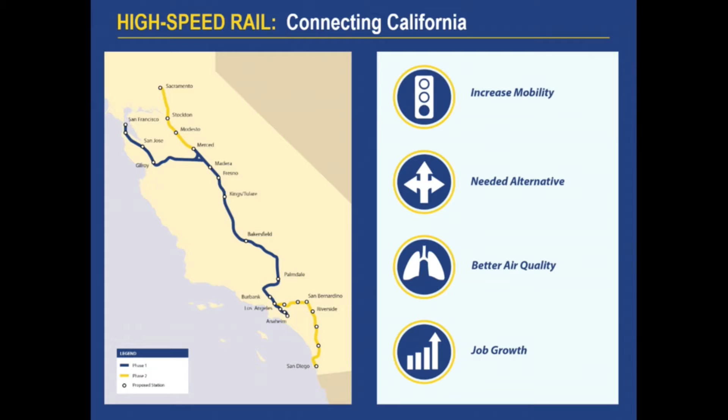It can be quite a challenge to go short distances, and a very big challenge to go longer distances. Just for your frame of reference, if you were to have the high-speed rail operating in the future from Palmdale to Burbank, that trip would take you less than 20 minutes. Today, if you drive, particularly during traffic, that trip takes an hour and a half, possibly even 2 hours. So that's the kind of mobility we're looking at with the high-speed rail service.

We're also looking at the fact that because it's electric, it's not going to be emitting any greenhouse gases into the environment. The state of California has identified climate change as a key issue we want to address through this century. We also want to make sure we are fostering a strong economic climate for the future.

I talked about those connections between the central business districts that will be so critical that this project will bring to the fore. But while this project is being built, there are also a lot of jobs associated with it, and there would be a lot of jobs associated with it when it was operational, because we would need people to take care of the trains, run the trains, and take care of the stations and all the associated equipment with this project.

So those are the reasons why high-speed rail has been selected to complement our existing transportation system. And I think that's key too - this is meant to complement what we have now, not replace anything. Once we start running these trains, they complement our existing trains. We have stations in areas that are easy to get to on other forms of transportation so that you have smooth and easy connections across the state.

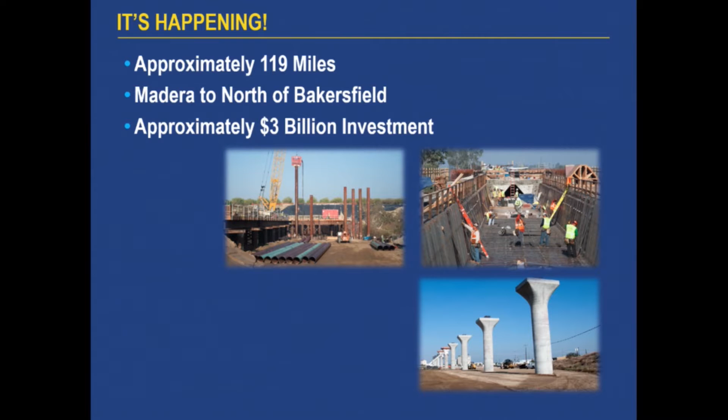You can see on the slide pictures where we started construction, building the bridge structures we need. This is why it's so critical that we do our job down here and define the route we'll build the high-speed rail alignment along, because we're building it right now. We want to do a very good job identifying how we're going to build it down here in Southern California, so that when we get here, we have a whole set of good decisions made and we can continue the construction.

This is the slide that encapsulates what we're doing here from Burbank to Los Angeles. It's a 12-mile section of the high-speed rail project. We're treating it as a separate project for environmental clearance purposes, with a station in the north at Burbank and a station in the south at Los Angeles Union Station.

This marks the transition of the high-speed rail project in Southern California from full-speed high-speed rail coming into the Burbank area, and then from Burbank south to Anaheim, we're entering the existing rail corridor and would be bringing high-speed train service alongside our existing Metrolink, Amtrak, and freight services operating in our existing rail corridors.

When we look at and plan this, there's a lot of coordination we need to do to make this work. We're talking with the other rail providers and we've put forth a series of ideas for this corridor. Number one, we can put additional tracks in a lot of this corridor within the existing right-of-way, then electrify these tracks and run high-speed rail in this corridor.

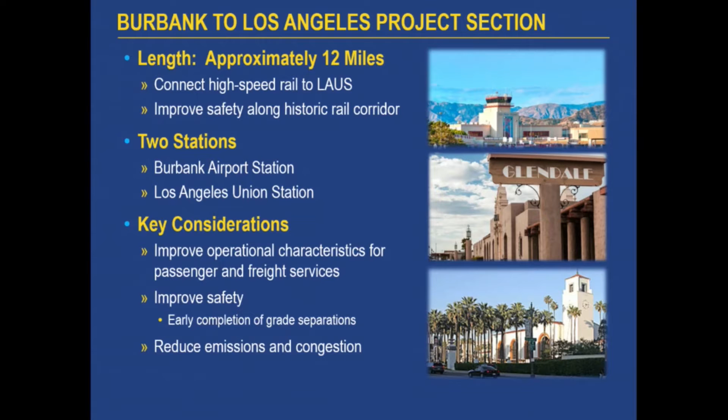While we do that, we can put in the capacity in this corridor to operate high-speed trains as one of the service offerings. There would still be Metrolink service in this corridor, there would still be Amtrak service in this corridor—we'd just get the benefit of all these services in the corridor. That's the general approach we're taking in this corridor south of Burbank.

We need to put stations where we can get the most people riding the train so that we get the most public benefit. Those are the types of things that fall into the project objectives area.

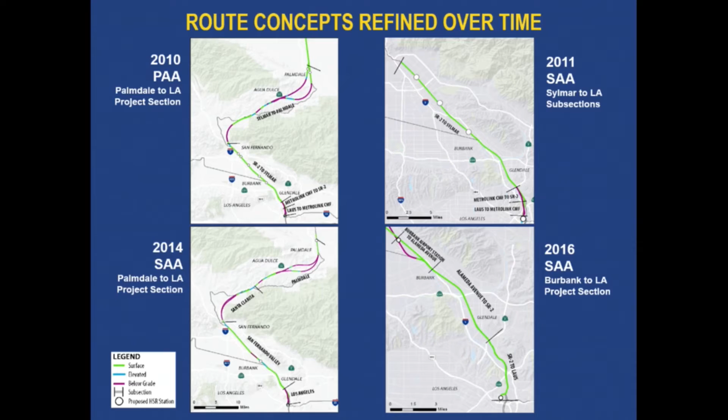With all of the complexities going on in this area, we felt it was very important to study this as a single standalone project so that we could deal with the coordination issues with the LA River, for instance, which is in this area, and with the operation with the other service providers. Over time, we were able to identify this as its own separate environmental document and handle it that way.

It's also very important to note that the decisions in this section do not drive the decisions in the sections to the north or the south. The decisions that are come to for Burbank to Los Angeles, particularly with regards to the station configuration, don't in any way influence what we would ultimately end up selecting for the Palmdale to Burbank project section. So that's something very important to note here as well.

Here at a high level is a summary of the principles we're employing as we look at these urban corridor running projects. You can see up there at the north, there is a purple section that is on a curve, and there is a green straight section.

We have been looking at two potential locations for our platforms for our train to stop in the vicinity of the Burbank Airport. One of those locations basically brings that stop very close to where the airport is proposing to relocate their terminal. We've been looking at this for a couple of years, and they needed to go through the election process to have that terminal replacement project approved.

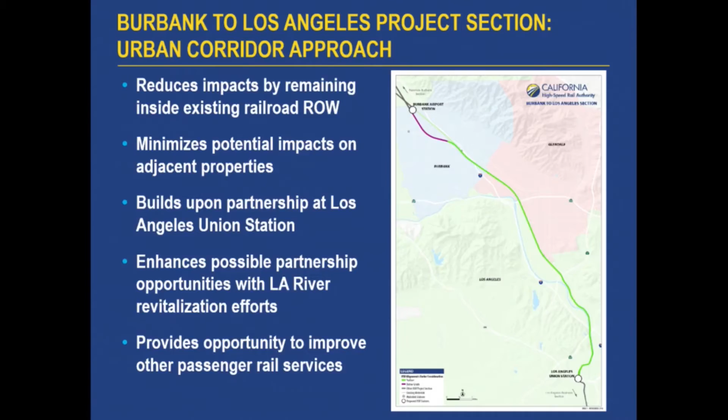So again, we just want to stress that this is a mixed use corridor. There would be multiple services operating in this corridor. It is owned by LA Metro right now, and it hosts the Metrolink, Amtrak, and freight service. It would continue to do that in the future. We would weave in high-speed rail service into that mix and increase the capacity there for more train service.

And with that, I'll bring up Melissa to talk a little bit more specifically about some of those features of sealing the corridor and creating this high mobility urban corridor concept.

Good evening. So as mentioned, we're going to walk through the corridor in a little more detail, zooming in city by city, what the project looks like as we move down the corridor.

Starting in Burbank, we were just talking about the two platform options, and you can see in a little more detail the purple option that swings slightly to the south, and the at-grade option, which is a straighter alignment to the north.

This alternative maintains the downtown Burbank Metrolink station in its location. We pass that station at grade and move south into the Glendale area. There are two grade separations associated with the at-grade alignment that are currently being worked on by Caltrans.

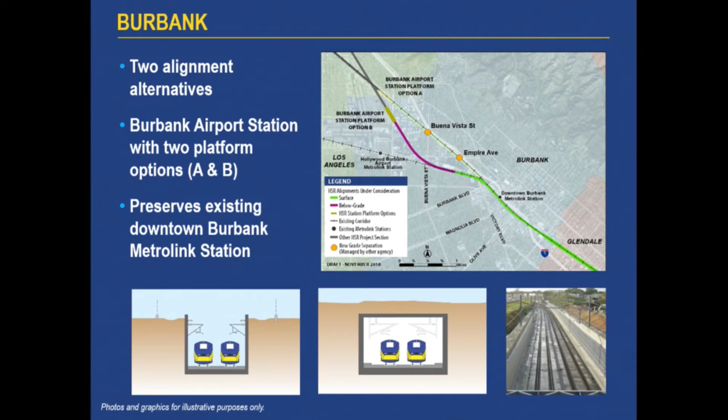Moving southerly into Glendale and Atwater Village, you'll note that the alignment through here is all green, all at grade, and the little circles along the alignment are all of the at-grade crossings and grade separations that are proposed as part of our project to implement, which we'll get into more detail later.

The station here is the Glendale Metrolink station. Again, we're preserving that historic station in place with tracks running on the westerly side of that alignment. In this part of the corridor, we're essentially proposing two electrified tracks and two non-electrified tracks running within the existing right-of-way. Where we bulb out from that is in the areas of those grade separations.

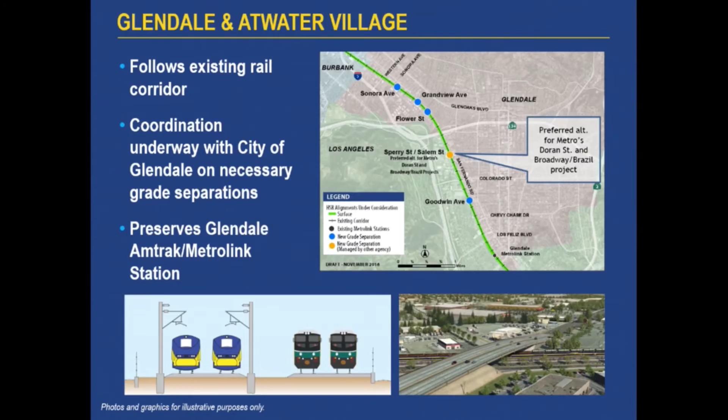Further south from Glendale into Los Angeles toward our terminus at Union Station, we stay at grade along the existing corridor. The one at-grade crossing that remains here is Main Street, which we will be separating.

We are coordinating with the Metro team for Link Union Station, which is essentially the run-through tracks, to come into Union Station with all the other providers that are running along this corridor with us. So they will be bringing high-speed rail into the Link Union Station project.

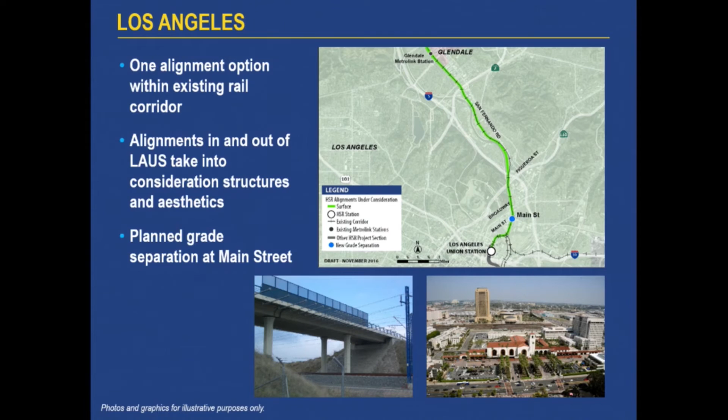Just to talk about other project features associated with the alignment statewide, it's not just the tracks and the trains. There's also the overhead catenary system, which are the wires that run above the trains, so that will be part of the project. There are paralleling stations, switching stations at various intervals throughout the corridor. This is a short section, so we don't have as much of that equipment here, but it is part of the proposed project, along with the early earthquake warning system and intrusion protection that was mentioned previously.

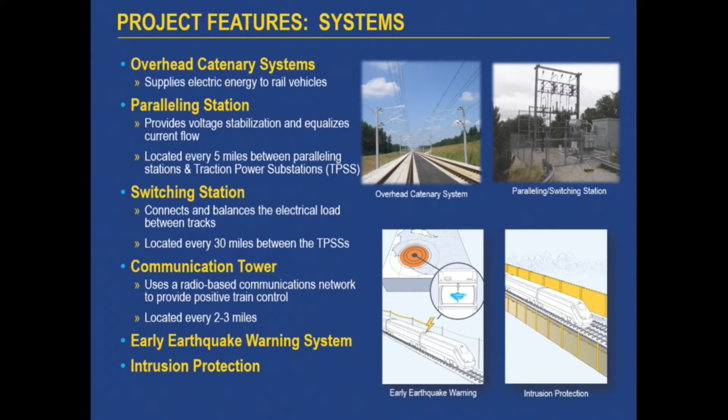Focusing in on the features of the grade separations in a little more detail, you'll note that the majority of those are in the Glendale area. There's Sonora, Grandview, Flower, and Chevy Chase are the existing grade crossings, and then on the south is Main Street. So we are proposing to grade separate all of these. It is going to be a completely grade separated corridor from Burbank to LA.

Something to note is that we are not just separating the high-speed rail, we're separating all of the operators that run on the tracks there currently, so it will be completely separated. The one in the middle there with the highlight is actually the Doran grade separation project, where there's currently a proposed grade separation at Salem Sperry to take the place of Doran and Broadway Brazil. And also at Chevy Chase, there's an option to do the grade separation at Goodwin.

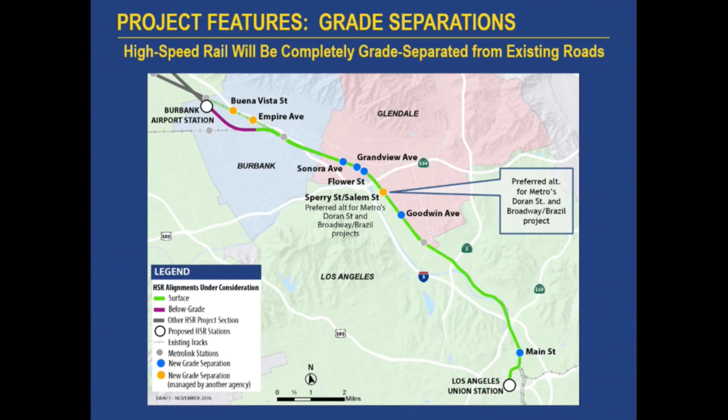So I mentioned that this is where we're focusing on the impacts, because this is where the impacts leave the corridor more than in the straightaways. So in exchange for that, we get these safety benefits of having the rail fully separated from the road. We have reduced noise, as mentioned, it's compatible with a quiet corridor through this section. There's reduction in greenhouse gases, since the cars don't have to sit idling waiting for the train. We also have improved train operations through the corridor as a result of implementing these.

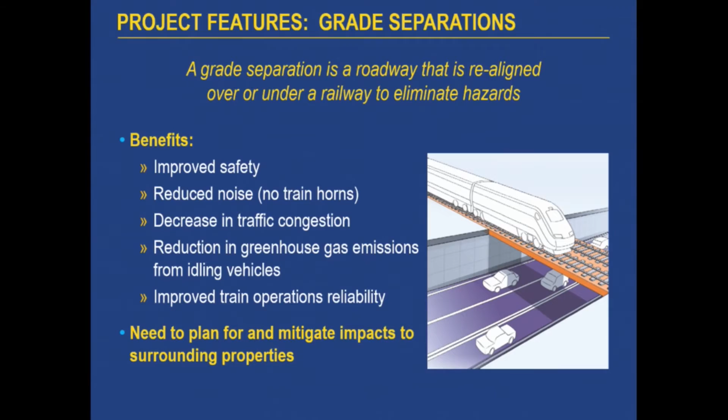So that is kind of a sample of one of the grade separations. We're proposing to take the roads under, but we are looking at what the impacts are and letting that drive the ultimate decision on these.

The grade separations that are underway in the corridor by other agencies are the two I mentioned by Caltrans, which are Buena Vista and Empire, and then the Doran grade separation, which is Salem Sperry.

So now I'm going to have Jaime Guzman come up and talk a little bit about the environmental process.

Hi, good evening everybody. Thank you for coming out here. My name is Jaime Guzman. I'm the environmental manager for high-speed rail for this section. I want to give you a brief overview of the environmental process, where we have been, where we are now, and where we hope to take the environmental documentation in the next year.

For those who have followed us for a while, and for people whose first time this is, we've been primarily in the planning process, completing some alternative analyses and some preliminary environmental and engineering. Now we are going into a more robust environmental process where we're completing technical reports, and also doing some further refinements in engineering. We're then looking at potential impacts and going back to the engineering to see if there's possible ways to avoid some of those impacts.

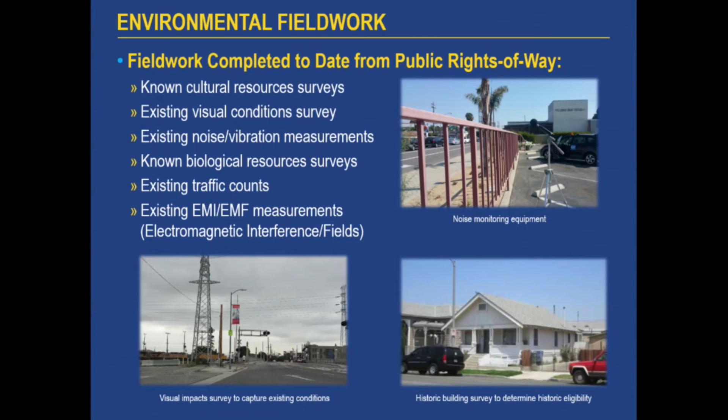As for a timeline, right now we're coming out here to get more input, to present where we've gone from the last step, which was the alternative analysis. What we're hoping to do is that by summer of next year, we will have an environmental document to review. And then at the end of next year, we could have a final document.

Before the draft document, there will be opportunities to come out to the public and for people to present their ideas to us as well. As was mentioned, for areas where we know we are going to impact outside the right-of-way, which are the grade separations, we'll be having more detailed meetings with the community focused on that. There is actually a station where you can sign up if you want to be emailed for those specific meetings if you live in that area.

In addition to that, after the draft, we will be having a formal review period and a formal public hearing where your questions will be taken, and then all of that will be incorporated into the final document.